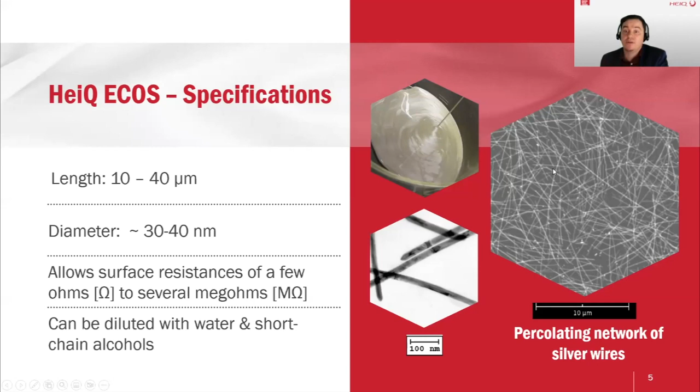And on the right-hand side here, you can see a SEM image of a coated polymer film. And these tiny white structures that you can see here are the silver wires. And if you take any point on this surface, you can see that we form an interconnected network among the entire surface. And this interconnected network is responsible for conductivity. And the areas that appear gray or black here in the SEM, in the scanning electron microscope, are transparent to the human eye, at least if you use a transparent substrate. Therefore, with silver wires, with HeiQ ECOS, we can generate transparent and conductive surfaces.

And the main parameters that characterize such transparent and conductive surfaces are, on the one hand, the sheet resistance or the conductivity, and on the other hand, the transmission or the transparency. And the blue curve here is our HeiQ ECOS. And what is demonstrated here is that we can cover a huge range of sheet resistances with HeiQ ECOS, simply depending on the amount of silver wires that is deposited on a surface. And this is a very important point because depending on the target application, we need different sheet resistances. And still, from 5 to several hundred ohms per square, we have very good transparency and transmission values.

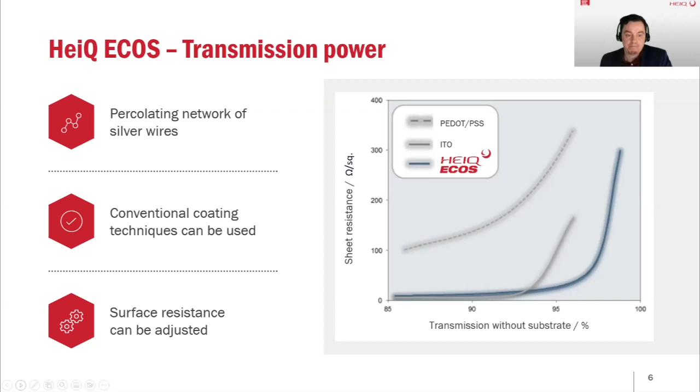We see 4 main building blocks for target applications. First one is transparent heating. Second one is transparent low E coatings. Third one, signature management and printed electronics.

And I will briefly introduce these 4 building blocks, and afterwards we will hear something more detailed concerning selected applications. For transparent heating, on the right-hand side here, you can see the back window of a car. It's a substrate that was coated together with a partner. We made this development with an industry partner that was coated in an industrial process with HeiQ ECOS.

Afterwards, bus bars were applied to have a contacting of the layers, and a top coat was applied to protect the silver wires and the layer against influences from outside, and to maintain a good mechanical stability and the stability against water, solvent, against abrasion resistance, and so on. And if you now apply a voltage, we get a very homogeneous surface heating. Even if you apply a low voltage, something between 12 and 24 volts, which is typical values in the automotive arena.

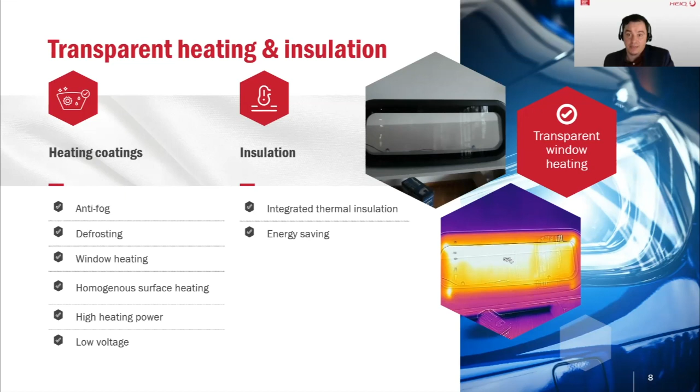And well, this is a quite large substrate here, but of course we can adjust the size of the substrate depending on the target application, and also the heating power can be adjusted depending on the voltage that you apply and depending on the amount of silver wires that you bring on such surfaces.

Second example, the low E effect, the low emissivity effect. I would like to show a visualization of this effect, and Jochen Manara will later on show more details what this effect is about and where it can be used. First example here is on the left-hand side, a polymer film coated with HeiQ ECOS. On the right-hand side, the blank, the uncoated substrate.

And now we hold our hand in front of this area with a certain distance and look at it with the infrared, with the heat camera. And what we see here is where the HeiQ ECOS is present, the heat that is generated from the hand is reflected back from the surface. Whereas on the right-hand side, the uncoated substrate, it appears blue, so no heat is reflected. And the same effect is shown in this short video.

In this video, we printed the HeiQ RAS logo on a transparent substrate, and I'm holding my hand quite close to the surface, look at it with the heat camera, and you can see that the heat that is generated from the hand, the printed logo reflects it, and this can be detected in the heat camera. It's a visualization of the low E effect.

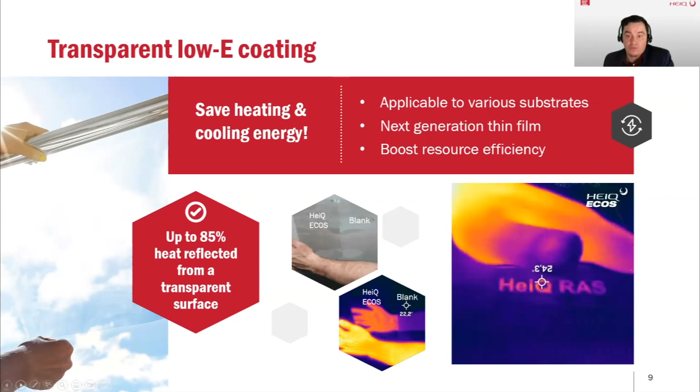Transparent printed electronics. Well, as I mentioned, the HeiQ ECOS formulation can be deposited on a variety of substrates, and is also appropriate for roll-to-roll processing, for example, on polymer films. And one target application of this roll-to-roll coating is in organic photovoltaics, as electrode in organic photovoltaics. And Andreas Distler and Niggemann will later on show where this is used in more detail.

One important point is the resource efficiency. For example, for a target conductivity of 100 ohms per square, with 10 grams of silver wires you can coat more than 200 square meters of polymer film. So it's a very resource efficient material. And it's also flexible. So if you bend, for example, the polymer film and relax it, you will not lose conductivity. The conductivity remains because the silver wires are very tiny and ductile structures.

Well, and finally, signature management. Well, if we can reflect heat radiation, or if we can adjust the degree of heat reflection, we can also adjust the degree of shielding for other wavelengths. For example, for EMI shielding, the silver wires can be used. It simply depends on the amount of silver wires that is deposited on a surface, and if you want, on the mesh size that you generate with the silver wires.

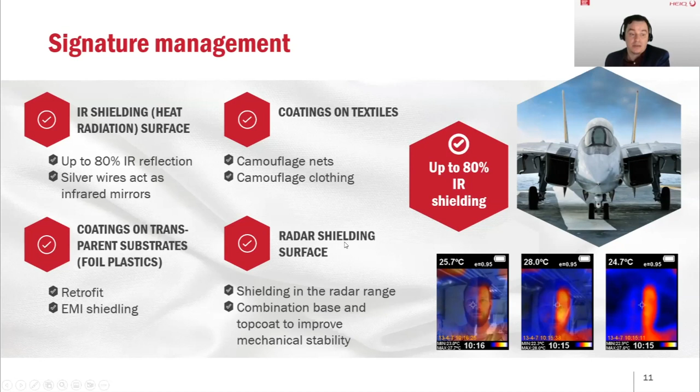And also in the microwave and radar range, it is appropriate to shield these electromagnetic waves. And the degree of shielding can be adjusted depending on the customer needs and also depending on the target applications. And with that, I would like to hand over to Jochen Manara to present more details concerning low E coatings and silver wires.

Yep, thank you very much for your introduction. Now I will give some short overview of silver nanowires as an application for transparent low E coatings. So you may go to the next slide, please.

So I'm from the Center for Applied Energy Research, and we are working on a wide range of activities related to research and development, from the basics to practical applications, for example, the low E coatings. And beside research and development, we are also preparing and characterizing prototypes and demonstrators, as well as performing consulting and doing acquisition for funded projects and the management of research networks, as well as providing scientific services and organizing seminars and conferences.

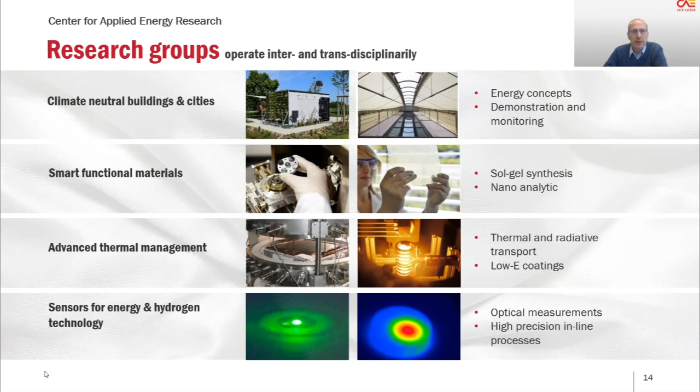And in the advanced thermal management, we are working on low E coatings, or in general on thermal and radiative transport, as well as on functional coatings. And finally, the sensors for energy and hydrogen technology. We are performing optical measurements as well as high precision inline processes. But now I want to come to the topic of this presentation, the low E coatings provided by the silver nanowires.

So in general, low E stands for low thermal emissivity, as already mentioned by Oliver Zech. And here you see a visualization of this effect. So on the left, you see a surface with a low E coating, and this low E coating reduces the amount of thermal radiation which is emitted by the surface. In contrast to that, on the right, you see a conventional surface with a high emissivity, which emits a larger

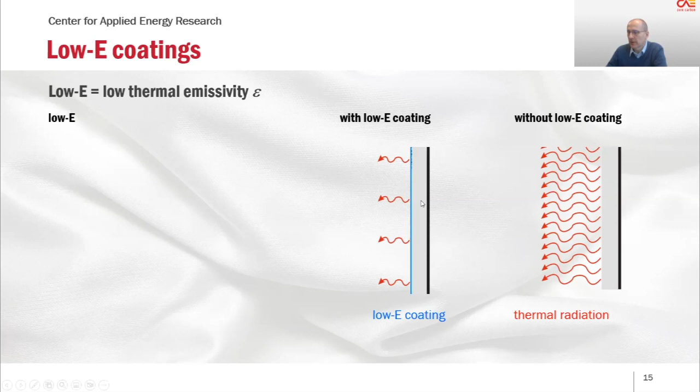amount of thermal radiation. Additionally, the low emissivity equals a high thermal reflectivity R, which has been demonstrated by Oliver Zech already in the video, and which can be seen here on the infrared thermogram. So here on the right, you see a glass sheet without low E coating, and on the left, the glass sheet with low E coating, and the heat from the hand in this case is reflected by the low E coating, whereas the reflection without low E coating is significantly lower. That means the silver nanowires reflect thermal radiation and therefore emit a low amount of thermal radiation into the surrounding.

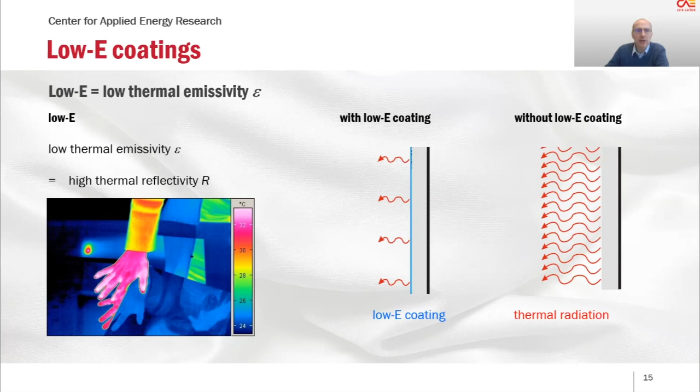In both cases, the thermal insulation is increased by the low E coating, and you can perform some calculations on this topic. For example, for glazing, by adding low E coatings to glazings, you can reduce the energy consumption by increasing the thermal insulation. And this can lead to a saving of heating as well as of cooling energy. So single glazing, that means a single glass sheet, provides a very poor U value. U value is the heat transfer coefficient. And here you have a U value around 6 watts per square meter Kelvin.

This can be halved by adding a second glass sheet. Then you have a double glazing. And by adding, next, please? By adding a low E coating on the glass sheet, you can halve the U value again. And finally, you can get to the triple glazing. So the next slide, please. And for the triple glazing, you have 2 low E coatings. And again, you can halve the U value by these low E coatings and by the additional glass sheet.

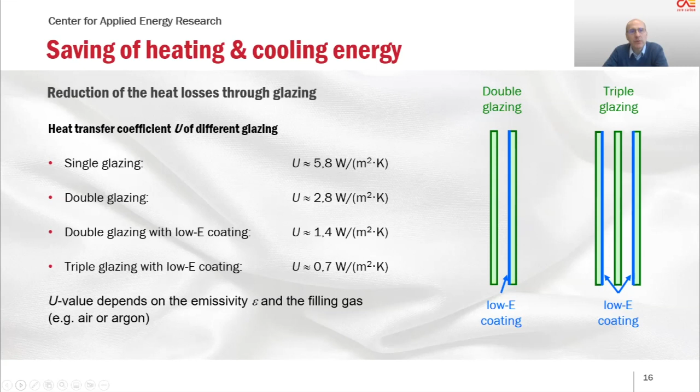That means by providing transparent low E coatings in this case, the heat transfer can be significantly reduced, and therefore the thermal insulation can be significantly increased. Of course, the exact value not only depends on the emissivity, but also on the filling gas, like argon or air, for example. And the same can be done for wall constructions, especially for external walls.

So next slide, please. Here you see a typical heat transfer coefficient of buildings due to the age of the construction of the building. So old buildings have high U values usually. For example, before 1977, you have U values of about 2 watts per square meter Kelvin, whereas for very new buildings, you have significantly lower U values. In general, you have a high emissivity for typical wall constructions.

So on the right, you see just a picture of an external wall, and then by adding a low E coating, which is shown here in blue, the emissivity of the surface can be reduced, and this reduces the U value of the construction of the wall. So in the table, you see the U value given for emissivity of 0.1 instead of 0.9. And on the next table, you see the reduction in percent. That means for old buildings, the U value can reduce by 20 to 30%, whereas for new buildings, the U value can reduce by about 5% when applying a low E coating.

In this case, a transparent low E coating has the advantage that you can see the color of the wall through the transparent low E coating, which provides the low emissivity.

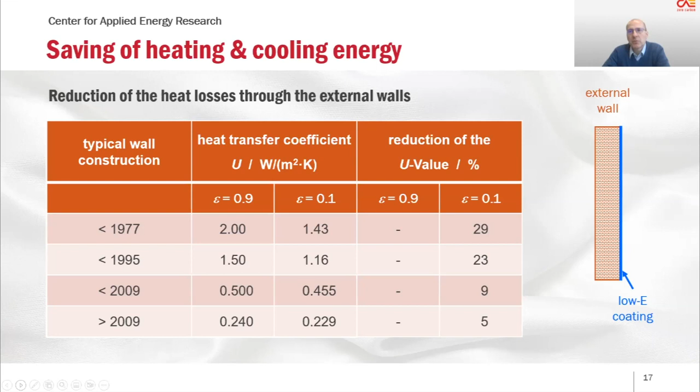So on the next slide you see the increase of thermal comfort. Beside increasing the thermal insulation of the wall construction, you also increase the thermal comfort inside the room, because a person inside the room emits thermal radiation into the surrounding, and the surrounding also emits thermal radiation to the person, like from the internal wall, but also from the external wall. During winter times, the temperature of the external wall may be very low or relatively low, depending on the U value of the external wall.

By applying a low E coating on the inner side of the external wall, part of the thermal radiation from the room or from the person in the room is reflected by the external wall, and therefore the person feels more comfortable inside the room. This gives an increased thermal comfort and an increased perceived temperature inside the room. The same is valid for summer times.

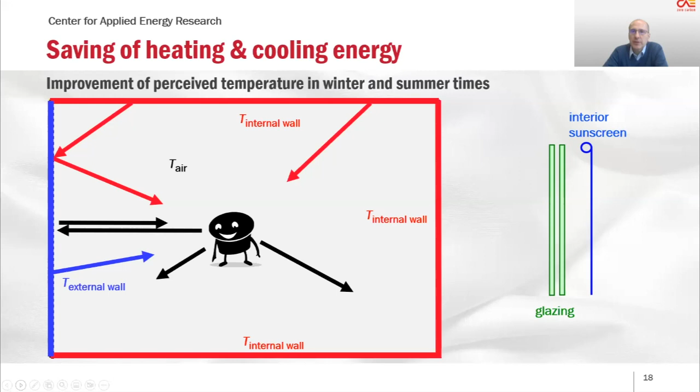Here, for example, you see an interior sunscreen behind the glazing. During summertime, the solar radiation goes through the window or glazing and heats up the internal sunscreen, which then emits thermal radiation into the room, and during summer times this reduces the thermal comfort.

But by applying a low E coating on the internal sunscreen, you can reduce the thermal radiation emitted into the room and therefore increase the thermal comfort also in summer times.

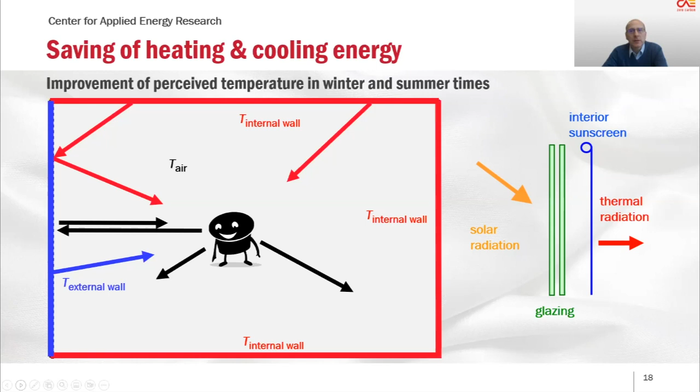On the next slide you see the values for typical low E coatings based on silver nanowires. As already mentioned, we want to have high transmissivity in the visible spectral region and low emissivity in the infrared spectral region. Low emissivity in the infrared spectral region means high reflectivity in the infrared spectral region.

Here you see the graph: the transmissivity in green and the reflectivity in red, plotted over the wavelengths, ranging from the ultraviolet spectral region over the visible towards the infrared region. In this case, you see a typical silver wire nano coating with a high transmissivity of about 72%, and low infrared emissivity of about 21%, which equals a high reflectivity in the infrared.

Here you see again an SEM picture, a scanning electron microscope picture of the silver nanowire coating. As already mentioned by Oliver Zech, the connections between the silver nanowires provide high electrical conductivity and additionally reflectance of the infrared radiation.

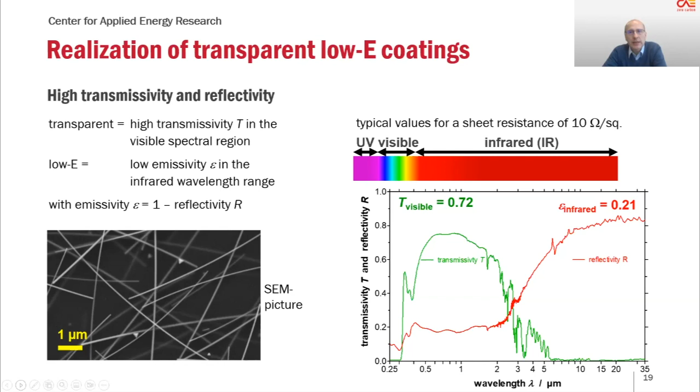So I come to the conclusions of this presentation. In general, the fields of application are, as already mentioned, in the building sector - the walls, but also the glazings or greenhouses, as already mentioned. Especially membrane constructions are of interest.

Here you see the ice arena in Landsberg am Lech, where a low E coating is applied on a suspended ceiling in order to improve the thermal properties of the building.

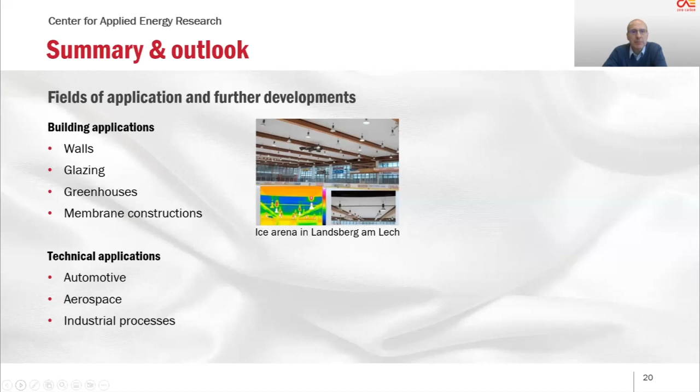The same can be done for transparent constructions, like for example the Royal Palace in Dresden. The courtyard is covered by a transparent construction, up to now without low E coating, but by applying low E coatings the thermal comfort can be increased.

Beside buildings, of course, technical applications are of interest, for example automotive or aerospace applications where thermal comfort or thermal insulation is of increasing importance.

Also industrial processes, and further developments would be the adjustment of the properties like the combination of emissivity and transmissivity, or the adjustment of the haze - usually low haze, but for some applications also larger haze would be desirable.

And finally, the adaptation on the substrates would be of interest, like applying the coating on different polymeric materials, on textile fabrics with high adhesion and high stability.

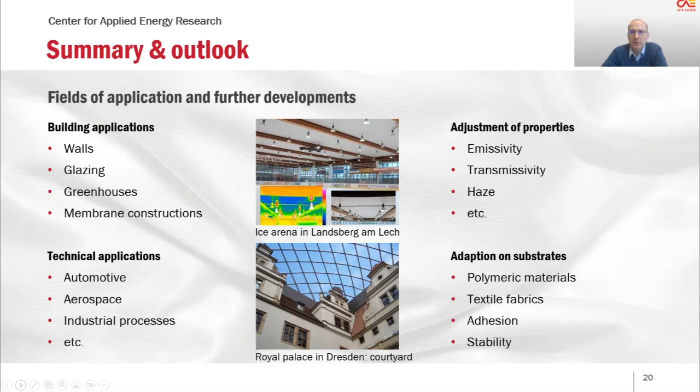So the next slide, please. Yeah.

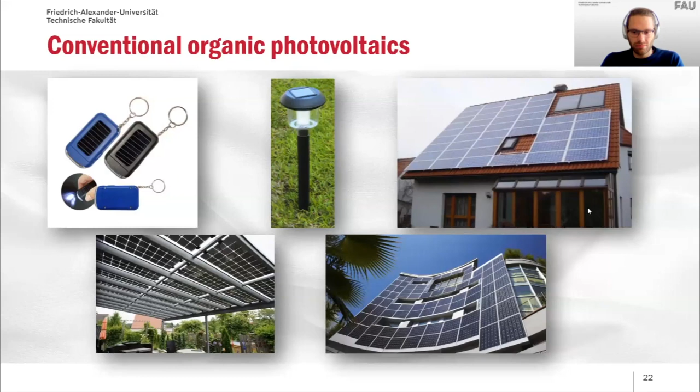What is printing organic photovoltaics, and why would we want to print solar modules? We all know these conventional photovoltaics on the rooftop, most of them silicon-based. They are a very important source for renewable energy, but to be honest, they look a little bit boring, and they are heavy, opaque, and not flexible. So what if photovoltaics could also look like this?

And actually they can, by making organic photovoltaics. You see here already lots of benefits, like the design. They can be transparent, you can tune the color, and you have a freedom of shape, so you can basically pattern them in any shape you want.

They are very thin, lightweight, and flexible, so you can integrate them into lightweight architectural structures or wearables, for example. They have some technology advantages, such as a positive temperature dependency, which means that in contrast to silicon modules, which get lower performance when they heat up during summer at noontime, they actually retain their efficiency or even get a little better when they get hot.

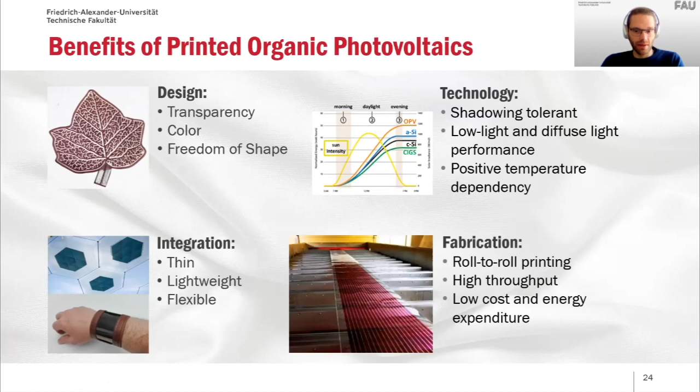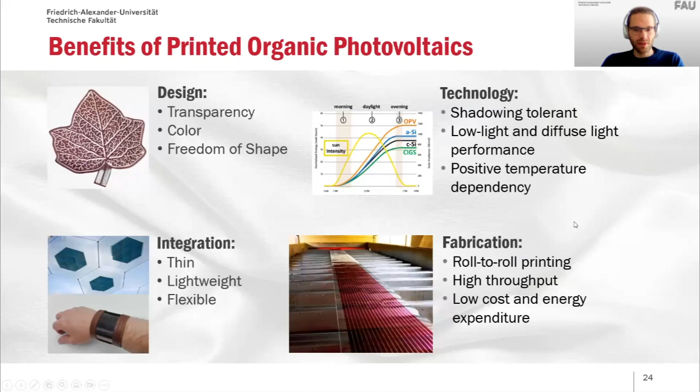A very important benefit is that you can manufacture them in a roll-to-roll printing process, with high throughput and at low cost and energy expenditure. The organic materials, which are the active layer in this solar cell stack, provide all these characteristics. But if we want to make a solar cell stack, the electrode materials also need to provide these characteristics - for example, they need to be transparent, otherwise we can't look through the module.

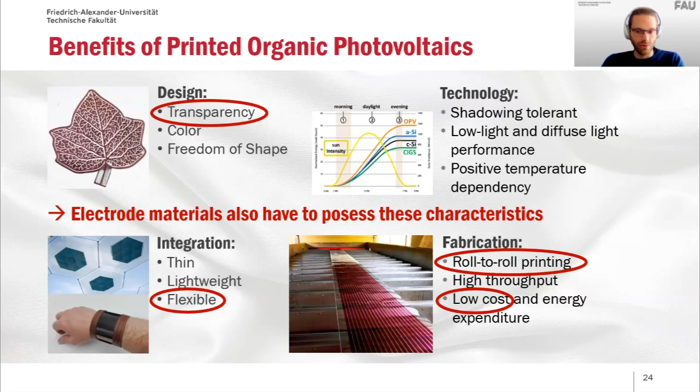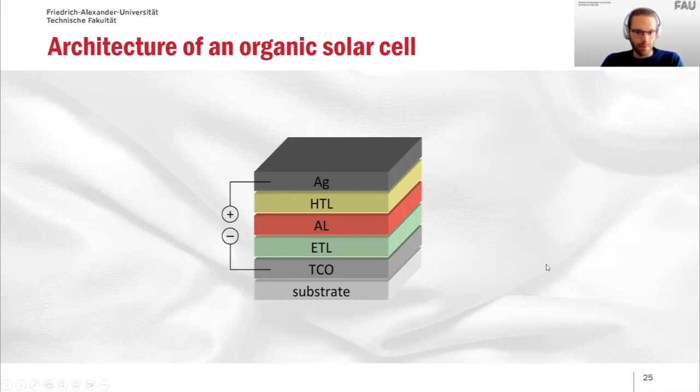Let's take a look at the architecture of such solar modules, take a look inside. The layers are printed onto a substrate, and the substrate is actually already 99% of the thickness of the whole module, because the whole layer stack printed on top is actually less than 1 micrometer thick. In the center, we have the active layer, the active material, which is organic - that's why it's called organic solar cell - usually a polymer or small molecule, so carbon-based materials.

This absorbs the light, the photons, and converts them into positive and negative charges, which are then directed by a hole transport layer and an electron transport layer on top of and below this layer. One lets only positive charges pass and the other only negative charges pass, so that we can extract the current out of the solar module.

Now, most importantly for this talk, are the electrodes. On the one hand, we have a top electrode, also called back electrode, because the light comes from the bottom through the substrate into the solar cell, and this electrode is on the back side, usually a thermally evaporated silver or a screen printed silver paste electrode. The drawback is, of course, that those materials are opaque, so you can't look through the module.

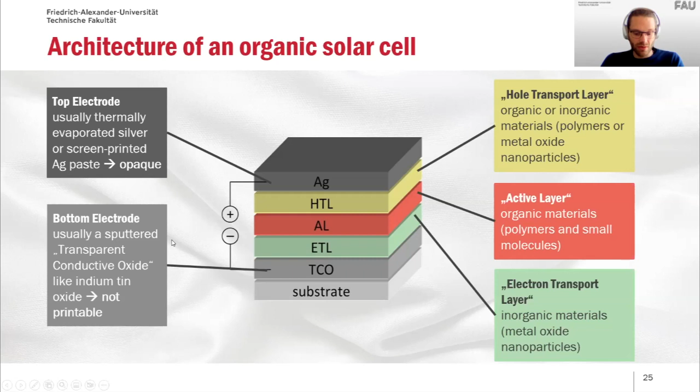On the other side, the front electrode or bottom electrode is usually a TCO, a transparent conductive oxide, like ITO, indium tin oxide. This material obviously needs to be transparent because that's where the light comes into the solar cell, so this needs to be highly transmissive. The drawback for the standard materials is that they are sputtered and because of this, not solution processable or printable.

So if we want to replace those electrodes with the silver nanowires from HeiQ ECOS ink, if we want to replace the top electrode in order to obtain semi-transparent solar modules, we need low sheet resistance values below 20 ohms per square and fairly high transparency because we want to look through the module. Also, the haze should be quite low because it should not only be translucent, but we also want really clear vision through the module - as little light scattering as possible. And obviously we need homogeneous coatings because the modules have to have a nice appearance.

For roll-to-roll printing, especially with the organic active materials underneath, we need low temperature processing conditions because the materials are sensitive to high temperatures, so we need to stay below 120 degrees. If we want to replace the bottom electrode with silver nanowires, the requirements are similar - we also need low sheet resistance, but this time we need very high transparency, because this layer is in between the sun and the actual solar cell.

So everything that absorbs or reflects at this position will decrease the current of the module. Another very important requirement for bottom electrodes is we need a very smooth surface without agglomerates, because the whole solar cell stack is less than 1 micrometer thick. If agglomerates of silver nanowires, for example, are larger than that, this would shunt or even short the device completely. And again, we need homogeneous prints.

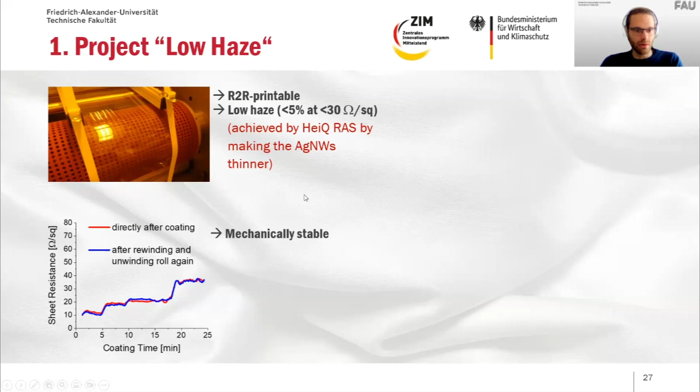The sheet resistance to transmission ratio was very good. The only drawback: we reached more than 80% transmission at less than 20 ohms per square sheet resistance as desired, but we needed to anneal it at 150 degrees to reach these values. So this could have been better.

But we tried it in our solar modules as top electrode and it worked perfectly fine. So you can see one of these semi-transparent modules with ECOS top electrode.

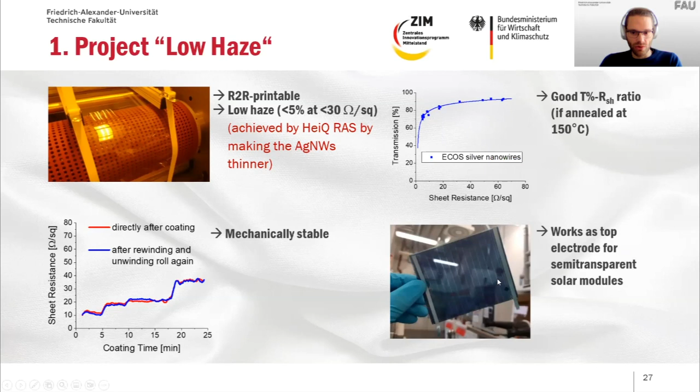The second project, which is actually still ongoing, is OPV for IoT. In this one, HeiQ RAS developed their ink even further, and this time we really achieve homogeneous coatings and great sheet resistances and great transmission values without even having to anneal the layers at 150 degrees. Not at all, or even at 120, we reached the maximum trade-off already. So that was a huge improvement and a very good achievement in this project.

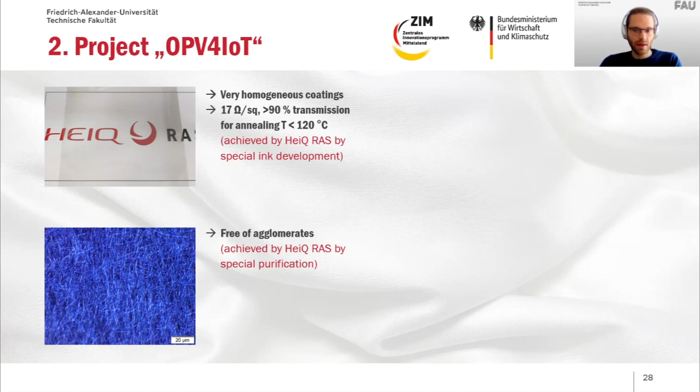The second very good achievement in this project was achieved by HeiQ RAS through special purification of the ink, so that we don't have any agglomerates in that layer, which is the prerequisite for using it as a bottom electrode. And that's what we did then: we replaced a sputtered bottom electrode with the ECOS nanowires in our solar cells, and the performance was comparable.

And last but not least, we also made modules out of this layer stack with ECOS nanowires as top and bottom electrode, which is actually not too easy, because for creating a module you need to connect several solar cells in series. The so-called interconnects are the regions where the top and bottom electrodes come in contact and have to conduct all the current. If both electrodes are silver nanowires, this contact area is really, really very low. But we achieved to make modules and connect several cells in series with good performance, achieving good interconnecting between silver nanowire top and bottom electrode.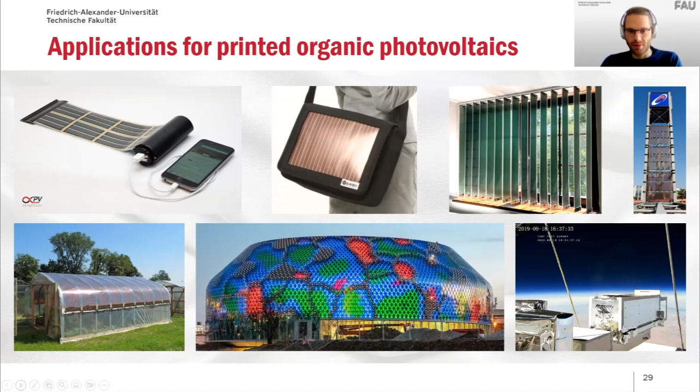And with this, I'd like to close my talk, and I stay available for questions afterwards. Thank you.

Okay, I'd like to continue my presentation. I will kind of continue where Andreas Distler stopped, so we are working on the application side. My name is Niggemann from Enerthing, and I will talk about accelerated decarbonization of buildings by sensor retrofit digitalization.

What we see from our company Enerthing's perspective is that buildings are under high pressure. We've talked about buildings in the previous presentations, but that related more to the energetic properties of buildings, and we have a different view on buildings from a different perspective. What we see now, since the topic of new work, is that buildings are not used anymore in the way they were used in the past. This is something that has changed recently. Another topic is that CO2 emissions of buildings have to be reduced significantly within the next 30 years.

And also, spending time in buildings, we know air quality is very important. So if you go to the next slide, what we see regarding the energy consumption of buildings is that 30% of the CO2 emission arises from buildings, primarily from building operation. And in the previous years, starting from the climate agreement in Paris, the new EU taxonomy, and also the increasing CO2 tax, there's an increasing pressure on buildings to change with respect to their CO2 emissions during operation.

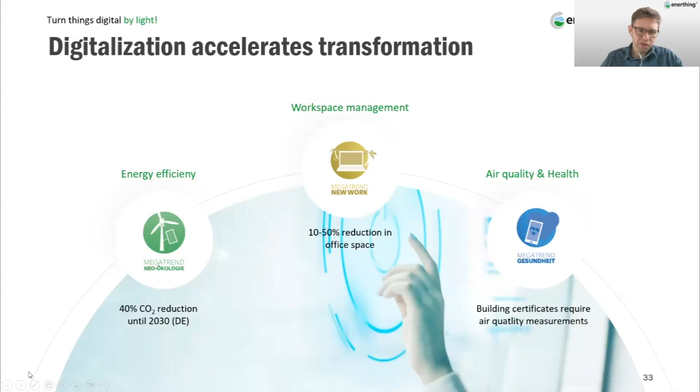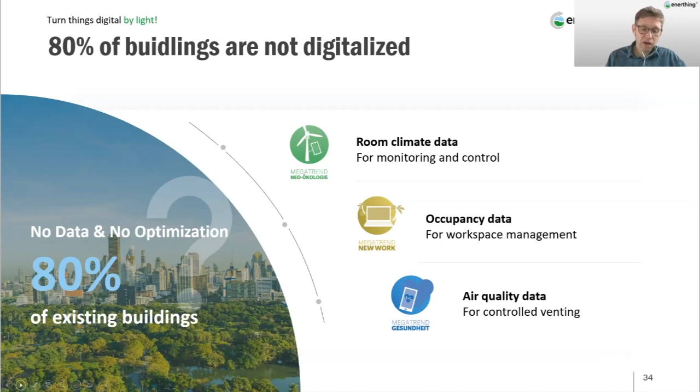And if you go to the next slide, if you now look at the building stock, you see that 80% of the buildings don't provide this data to do the optimization. So there's no data to improve the room climate. There's no data on the room level for monitoring and controlling the room conditions. There's no data about the occupancy of workspaces, of office buildings, and there's very little data on air quality within these buildings. If you go to the next slide, please.

So how to, let's say, digitize those buildings? There are only two ways nowadays. The first way is you start retrofitting buildings with wired sensors. And that's effectively a very expensive approach. It takes time, and nowadays there's not even the workforce to do this work, so this is a way that won't happen in the significantly large building stock.

Then the other option is you start with wireless sensors. Then you cut the wiring out of the equation, but you are still stuck with the powering of those devices, and that results effectively in additional maintenance work, replacing batteries after a year or a couple of years. This is not a very sustainable approach, and it's very expensive because you have to pay for the workforce to do the maintenance of your devices.

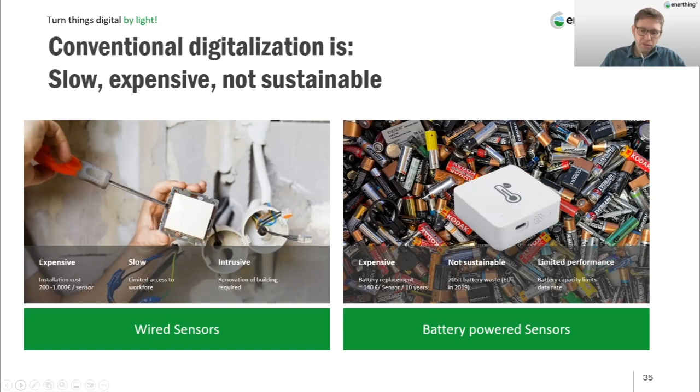So the solution, if you go please to the next slide, is what we've developed, and that relates to the technology Andreas has mentioned, the organic photovoltaics technology. This is a technology that not only works under sunlight, but is also very, very efficient under artificial light, so indoor conditions. What this does is effectively generate sufficient power to replace primary batteries. And this is what we've developed at Enerthing. We've developed a way to gather data on the room level by powering wireless devices with artificial light. So in principle, your pocket calculator, but in a very advanced form.

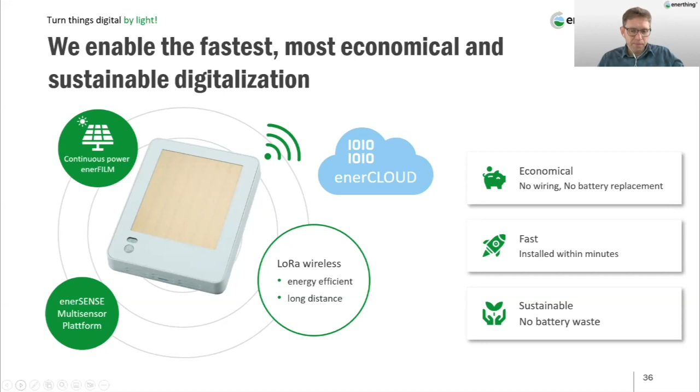And on this platform, we've implemented several types of sensors. We can measure occupancy, we can measure room climate, temperature, humidity, but also the CO2 concentration in air. And by combining this with a long-range wireless communication technology called LoRaWAN, we can retrofit buildings very fast. So within a couple of days, your building is transformed from an old 80s building to a modern building providing the important data. So it's very fast and it's also sustainable. If you go to the next slide, please.

So this is 20% cost reduction, and you end up with a return on investment of less than 12 months, but only by digitizing the buildings and improving the energy efficiency. If you go to the next slide, please.

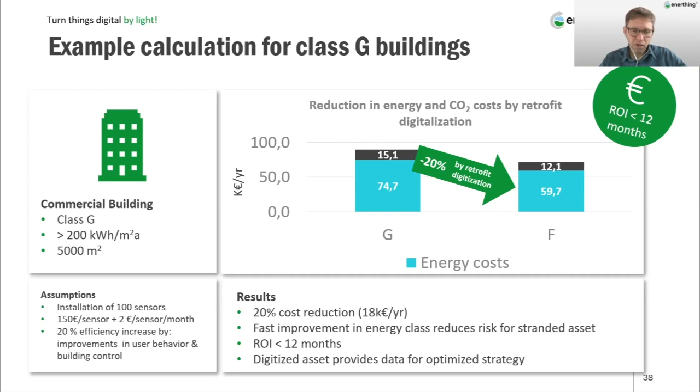So what is part of Enerthing is the technology knowledge. This is the way we differentiate in our product. We have an internal roll-to-roll production. As Andreas already described, this is a coating process, and based on this, we produce these indoor modules. And as part of the project OPV for IoT, Andreas has mentioned, we explore these transparent electrodes to further improve

the organic photovoltaic material, because at the end, energy efficiency is the key to produce the data we need for optimizing buildings. So there's a long path, but it's very important to optimize. Every photon we convert into a data point improves the efficiency of buildings at the end. And this is where nanowires play a role to make the organic photovoltaics under low light conditions even more efficient and also reduce the production cost. If you go to the next slide, please.